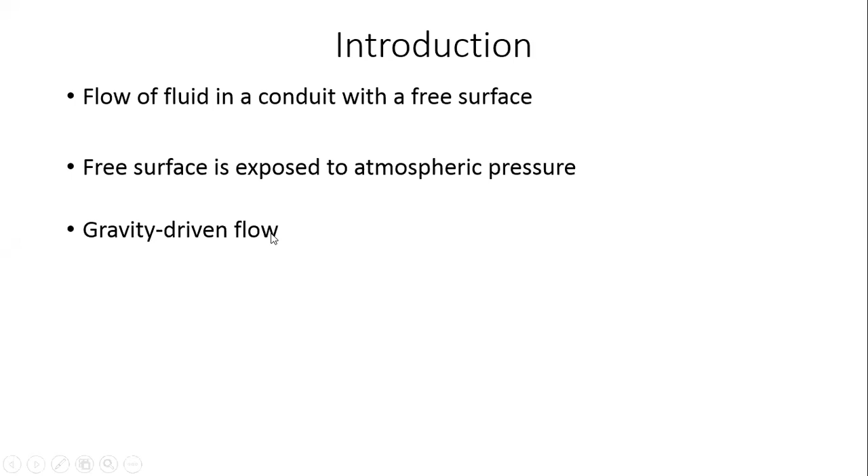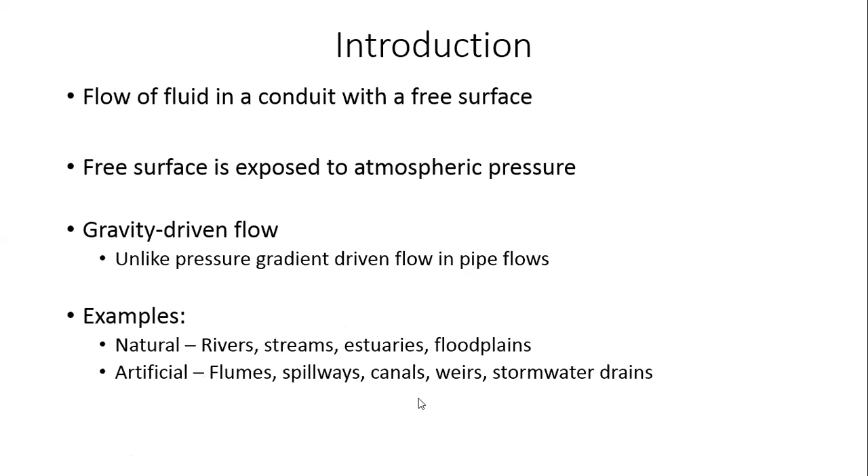We've got a lot of material to cover, so let's try to quickly get into open channel flow. The introduction portion we've already kind of done in the previous class, and I've also shown this lecture, so I don't want to spend too much time on this. All of this is known to you: flow of fluid in a conduit with a free surface is the fundamental definition of open channel flow, and this free surface is exposed to atmospheric pressure. The flow in open channels is predominantly gravity driven, unlike pipe flows which are pressure gradient driven. I gave some man-made and natural examples: rivers, streams, and estuaries are naturally occurring open channels, whereas flumes, spillways, canals, weirs, and stormwater drains are man-made or artificial examples of open channels.

So then we spoke about, if I give you a longitudinal view of the flow in an open channel, this is what it looks like.

I have the bed slope. The bed slope typically slopes in the direction of flow. So if the flow is from left to right, the slope will be going downwards from left to right, because that's what it means when I say it's gravity driven flow.

Gravity takes the flow in the direction of decreasing altitude. We use the symbol Y to denote the flow depth in an open channel. That's the standard symbol we use.

In terms of cross sections, there are many different types possible. Especially for man-made channels, you can have trapezoidal, rectangular, triangular, semicircular, and so on. Regular geometric shapes are possible for man-made channels, whereas natural channels have irregular shapes, which you can sometimes approximate as a trapezoid or rectangle, but in general they are irregular.

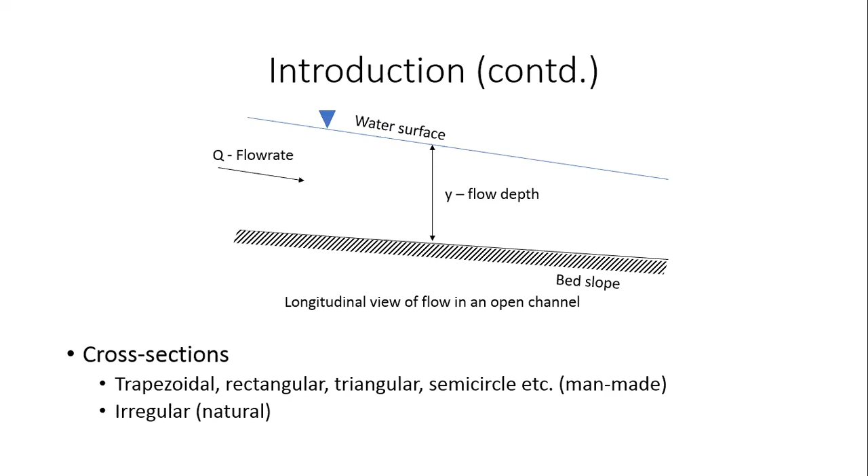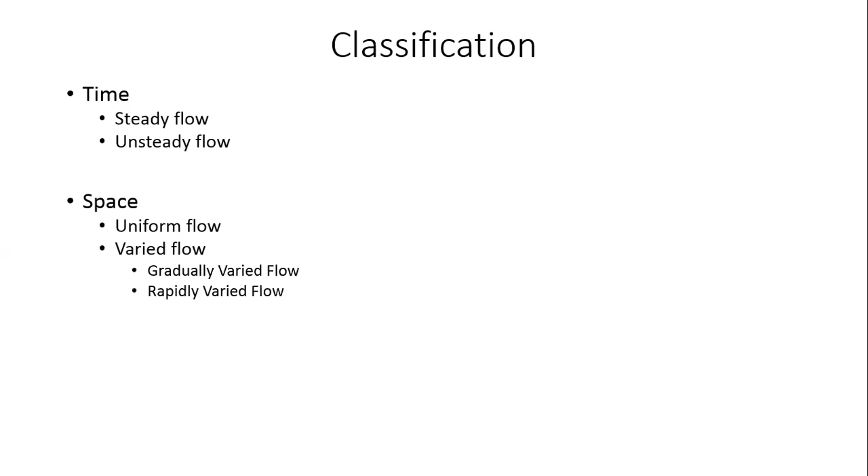So that's the very basic introduction to open channel flow. We also spoke about the classification, which I've already discussed at length, so I won't spend too much time. You have steady and unsteady on the basis of time, uniform and varied on the basis of space, and within varied you have gradually varied flow and rapidly varied flow. All of this is already known to you, so I'm not going to spend more time on this.

Reynolds number, of course, is rho v d by mu. Just like we had a classification in pipe flows into laminar, turbulent, and transitional, similarly we have a classification for open channel flow as well. The numbers are different because the characteristic length is different in pipe flow compared to open channel flow, so you get different numbers for the different classifications.

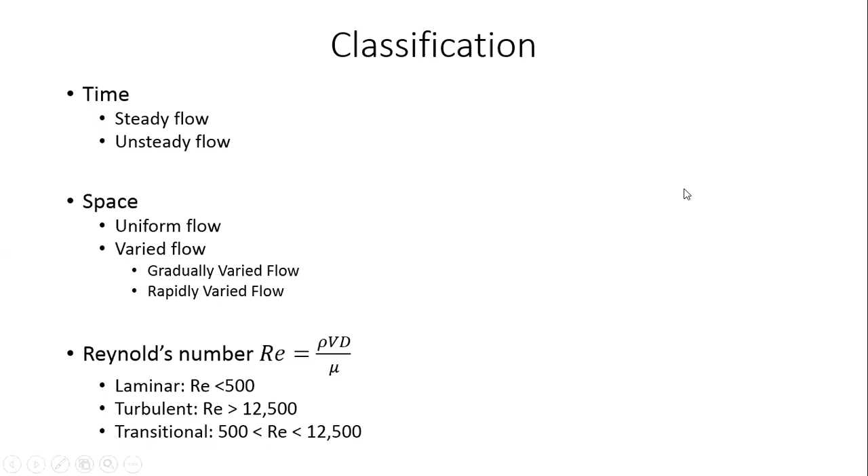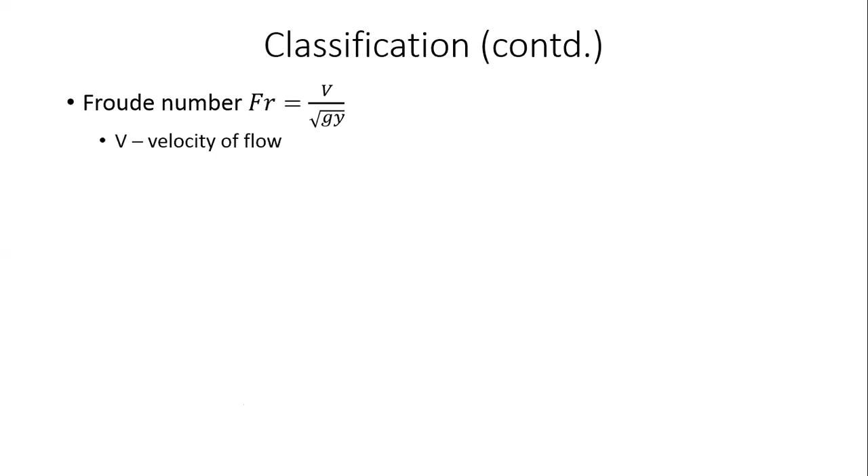The final one, which you haven't encountered so far, is the Froude number. This is essentially given as V over the square root of gy, where V is the velocity of flow, which could be the average velocity at any given cross section. g is acceleration due to gravity, and y is our flow depth. You can also think of it as the ratio of inertial forces to gravitational forces.

In open channel flow we had rho v d by mu, same as in pipe flow, described as the ratio of inertial forces to viscous forces. To find out which one dominates, we use the Reynolds number. In the case of Froude number, we use it to distinguish whether inertial forces dominate with respect to gravitational forces, or the other way around. That's what Froude number is.

What Froude number does is classify flow into 3 different regimes. If the Froude number is less than 1, we call it subcritical flow. If it's exactly equal to 1, the flow is called critical. And if it's greater than 1, we call it supercritical flow. We'll be talking about this again towards the end of the lecture, so we'll come back to this Froude number classification.

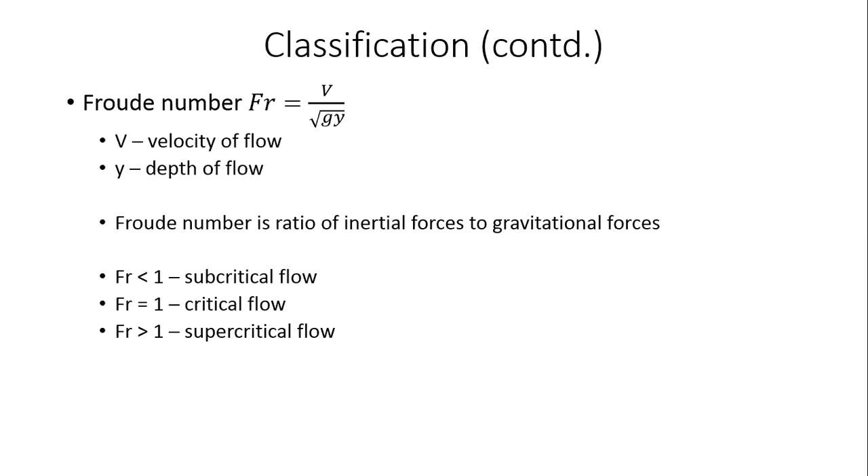So we already spoke about writing the energy equation for an open channel flow. Any questions so far on what I've spoken about?

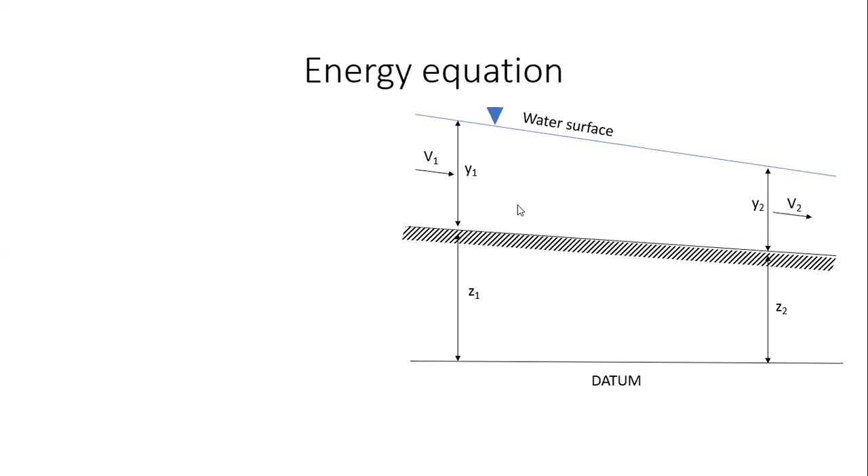So what we're going to do now is write the energy equation for an open channel flow, in which I've selected 2 random points, 1 and 2, where the corresponding datum elevations are Z1 and Z2. The flow depths are Y1 and Y2, and the velocities at those cross sections are V1 and V2. With all this information, I can write the Bernoulli equation between points 1 and 2 as Y1 plus V1 squared by 2G plus Z1 equals Y2 plus V2 squared by 2G plus Z2 plus HF. Naturally, between these 2 points, if flow is taking place, energy has got to be lost. The total energy at point 1 cannot be exactly equal to the total energy at point 2, because some energy will be used up in overcoming friction. That's what this HF term represents, which you're all very familiar with in the context of pipe flow. We're just putting it in the same context for open channel flow.

Okay, so now how did I get Y1 and Y2 in the first term of the Bernoulli equation? Can anybody answer that?

Why did I get Y1 and Y2 as the first term on both the left hand side and right hand side? Anybody wants to answer that? Okay, if nobody opens their mouth, then I'll call out somebody. Purna Chandra, one second. No, sir, no idea.

Pavan. Sir, I'm thinking. How have we got Y1 and Y2 in this equation? Usually when we write Bernoulli, we write P1 by gamma, P2 by gamma as the first term, right? How did we get Y1 and Y2?

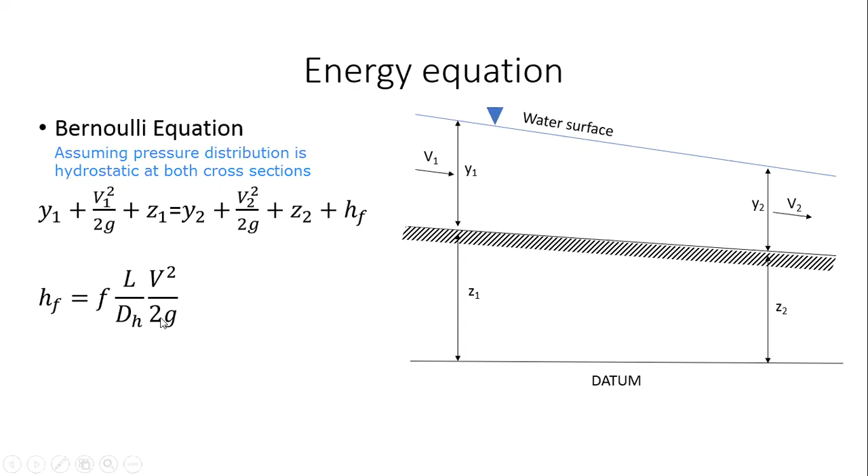But for a non-circular pipe, we came up with the concept of dh, the hydraulic diameter, defined as dh equal to 4A by P. In pipe flow, we also use another concept called hydraulic radius, defined simply as A by P, which is actually dh by 4. So hydraulic radius is A by P, which is one-fourth of dh.

Now the critical thing to remember in open channel flow is that only the portion of the fluid that is in contact with the bed surface counts in your perimeter. Let me just draw this quickly.

So imagine I have flow happening in a rectangular cross section, and this is the water surface. What is the area for this hydraulic radius equal to A by P? The area will be this region — let's say this is the depth. Let me draw it again: I have a rectangular cross section, the flow depth is from here to here, this is my flow depth y, and the bottom width is here. What is the area of the cross section in this case?

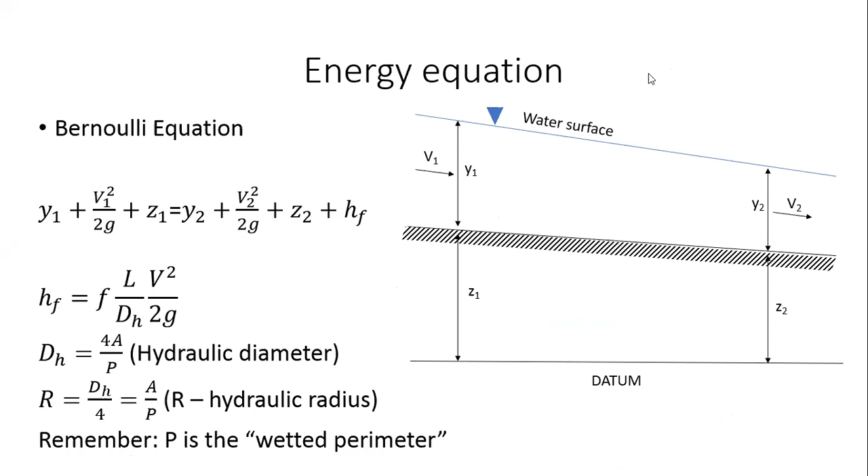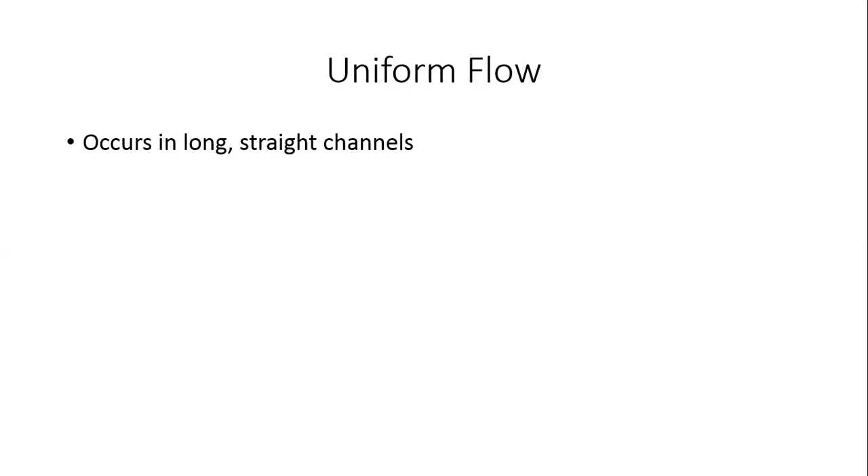Okay, so that is the concept of the Bernoulli equation in the case of open channel flow. All right, so now what we're going to do is we're going to talk about this idea of uniform flow. Uniform flow is a condition where I have constant flow depth across the entire length of the channel. So naturally, this cannot happen in a situation where the cross-sectional area is changing, or the slope of the channel is changing, or if the channel is winding and meandering like a river. If I have a long straight channel in which the slope is constant and the channel cross-section is also constant, then it is possible for me to have uniform flow.

And remember what the definition of uniform flow is - uniform flow means that nothing is changing as a function of space. So if I go along the length of the channel, at every point in the channel, the flow depth is the same. It is not at all changing. And since we are only going to be talking about constant flow rate, if the flow rate is constant and the cross-sectional area is not changing and it is a straight channel, why will the flow depth change? The flow depth at every cross-section will remain the same.

So that is this idea of uniform flow. Now, the interesting thing about this is that this approximation may not always be 100% accurate to use in every scenario. But the valuable thing about the uniform flow approximation is that it allows us to estimate flow rates in a wide variety of scenarios. You can assume that over a length of, let us say, 1 kilometer or 5 kilometers, the flow depth is not changing. And just by measuring the flow depth, you can convert it to an estimate of the flow rate.

So let us say you are an engineer who is employed by the state government, and then they come and ask you - let us say you are stationed at Kalahasti. Then near Kalahasti, there's a big open channel that takes water from the Krishna River all the way to Chennai city. I spoke about it last time, right? So they come and ask you, hey, what is the flow rate in the channel at Srikalahasti? Can you just go and check?

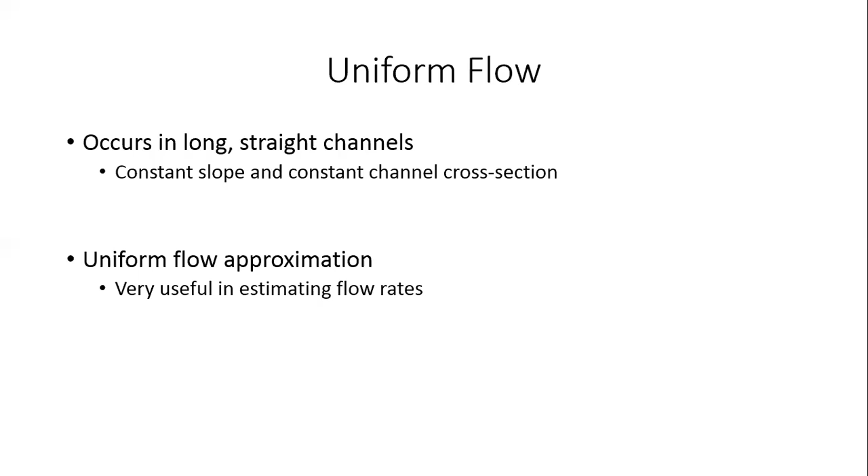So people can use this approximation to very easily estimate the flow rate, and then they can make decisions. Okay, so if this flow rate continues for the next 10 days, then so much water can be moved to Chennai city, or it can be moved to Chittoor district, whatever it is, right? So this uniform flow approximation is a very, very useful tool which allows you to estimate flow rates very easily. Just measure the depth and convert it to a flow rate, if you know the cross-section details and so on.

So you can have a river or a stormwater drain or an open channel connecting two different places where the water is flowing. You can very easily apply this uniform flow approximation to estimate the flow rate in an open channel. This has tremendous practical significance. So you will notice that throughout the rest of the semester, although we'll talk about gradually varied flow, rapidly varied flow, and all of these things, we'll keep coming back to the uniform flow approximation, because it is so powerful and so helpful in practical scenarios.

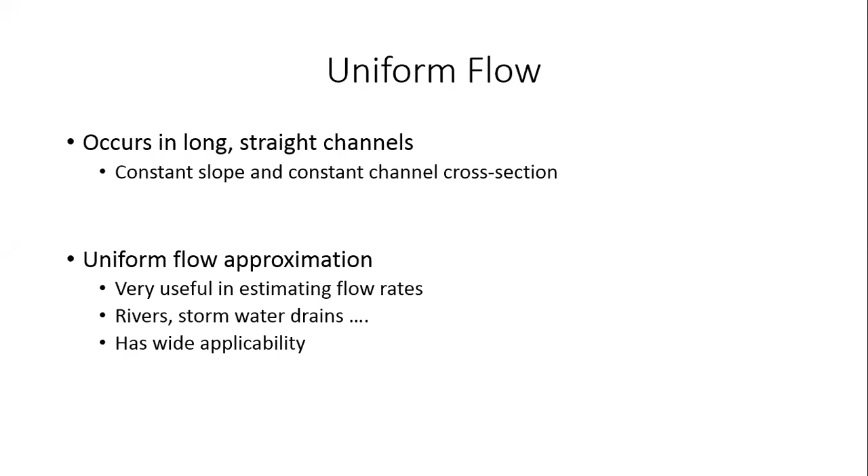Okay, so now this uniform flow approximation, we are going to use it to estimate the velocity at a cross section or the flow rate at a cross section. So this is what it's going to look like.

So now I'm saying that the flow is uniform. When I say the flow is uniform, it naturally implies that y1 and y2 are the same, it has to be the same. The incoming flow rate is steady, the cross section of the channel is not changing. So at cross section 1, if it is a rectangular channel, it is the same rectangular channel at cross section 2 also. So if flow rate is steady and the cross section is identical at both sections, then y1 and y2 will be exactly equal.

That's the very definition of uniform flow. And similarly, v1 and v2 will also be equal. So if I assume that the flow rate is steady and the cross section is uniform, then since y1 and y2 are the same, v1 and v2 will also be the same. So what does this mean?

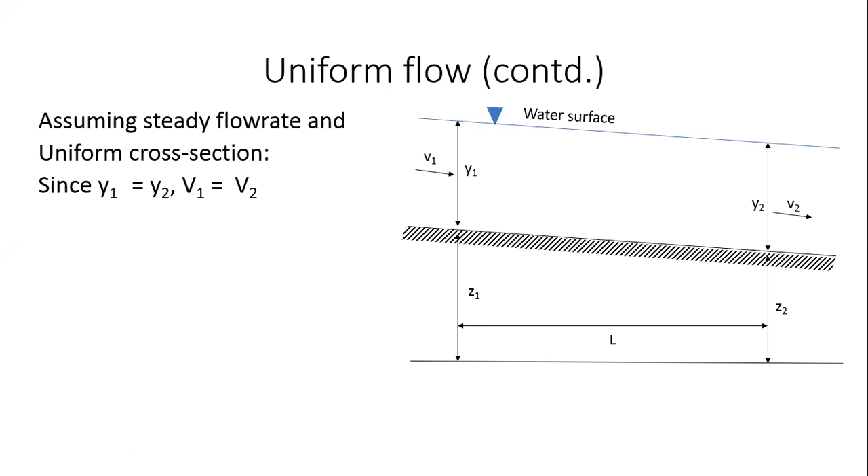This simplifies our Bernoulli equation tremendously. So our Bernoulli equation will simply become Z1 equal to Z2 plus HF. Everybody agrees with this? Y1 and Y2 are the same on both sides, V1 square by 2G and V2 square by 2G are the same on both sides. They all get cancelled out and you are left with Z1 equal to Z2 plus HF.

So now I can simply rewrite this as, if I assume the bed slope is S0, then I can write it as HF equal to Z1 minus Z2, which is equal to S0 into L. If the slope is S0, S0 into L will tell you the difference in the bed elevations between points 1 and 2. Is that okay? This is fairly easy, right? Simple geometry.

Okay, now we've already derived an expression for HF. Remember, a couple of slides back, we wrote FL by DH, V square by 2G. Now I've replaced that DH with my hydraulic radius. You remember hydraulic radius? Hydraulic radius is DH by 4. So DH, I've replaced it by 4R. Now I have two equations for HF. One is that HF is equal to S0 times L. And the other is that, okay, where is my mouse pointer?

Okay, there it is. HF equal to S0 times L, and HF equal to F times L by 4R into V square by 2G.

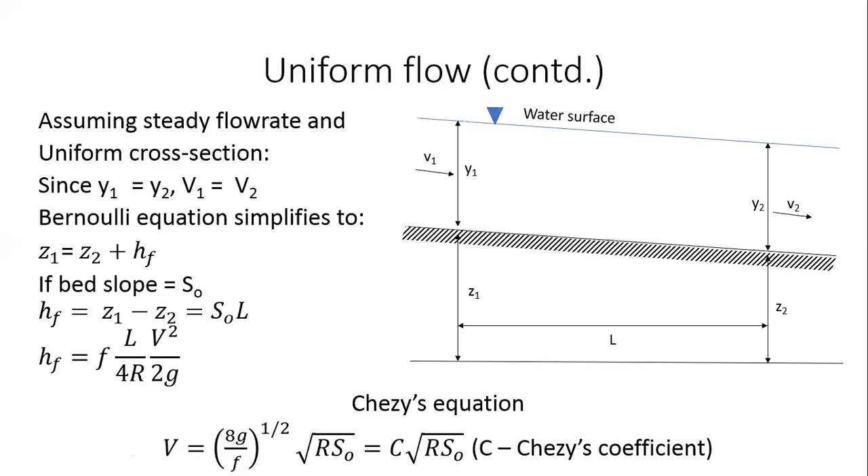V equal to 1 by N, R power 2 by 3. How did it become R power 2 by 3? The previous equation looked like square root of R. Now I'm replacing this C with R power 1 by 6. So R power 1 by 6 into R power 1 by 2 becomes R power 2 by 3, right?

So this is the very, very famous and popular Manning's equation. The velocity at a cross section is simply 1 by N, where N is this Manning's roughness coefficient, multiplied by R power 2 by 3 and S0 power half, right?

So now imagine this: imagine you are at that Kalahasti location. You've gone there to measure the flow rate, right? But you can't directly measure the flow rate - you just measure the flow depth. You know the slope of the channel at that location, because the channel is constructed by us, so we know what this bed slope is, so we know this S0 term.

We know that this channel is made of concrete. If we get a chance, maybe next semester we'll stop by that open channel. It's maybe about 20 kilometers from our campus - that's where we are going to get the water for our campus in the next few years. So the channel has a lining made of concrete, right?

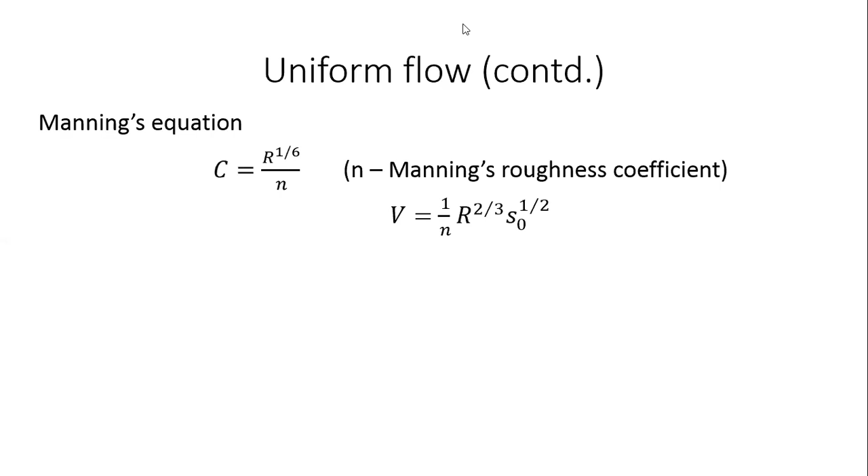You see how useful it is? I know that it is a trapezoidal cross section, and I know the shape details of that. I know what the bottom width of the trapezoid is. I know what the side slope of that trapezoid is. I know the flow depth - I go out and measure the flow depth, very easy to measure, right? You just put a scale in, a graduated scale, it tells you what the flow depth is. I know the bed slope S0. Then just using that one measurement of depth, I can quickly calculate what the velocity is. Multiply this by the area of the cross section, I get the flow rate, right?

So I can use either Chezy's equation, which will be Q equal to A into C under root R S0, or I can use Manning's equation, Q equal to 1 by N, A into R power 2 by 3, S0 power half. Is this okay?

The ranges for the different values of C and N are given. Chezy's coefficient typically ranges between 30 and 90. The units are mixed, so we ignore that. Typically we just say Chezy's coefficient is 40 or 60 or whatever it is. We don't bother with the coefficient's units, but remember that it has dimensions. We typically ignore this because it's mixed units and doesn't make any sense.

The roughness coefficient ranges from about 0.01 to 0.15. This again has mixed units. We typically just say Manning's coefficient is 0.01 or 0.02, and we don't bother with the units.

These are empirical equations, right? So what is the use of this expression? If I give you the flow depth, the cross-section details, and the bed slope, I can easily obtain the velocity and flow rate at that cross-section. Or in other words, if I give you the flow rate and the cross-section details, you can easily find out what the flow depth should be. Why would you need this? The first part is obvious - if I give you the flow depth and cross-section details, you can find the velocity and flow rate. But why do you need the second part?

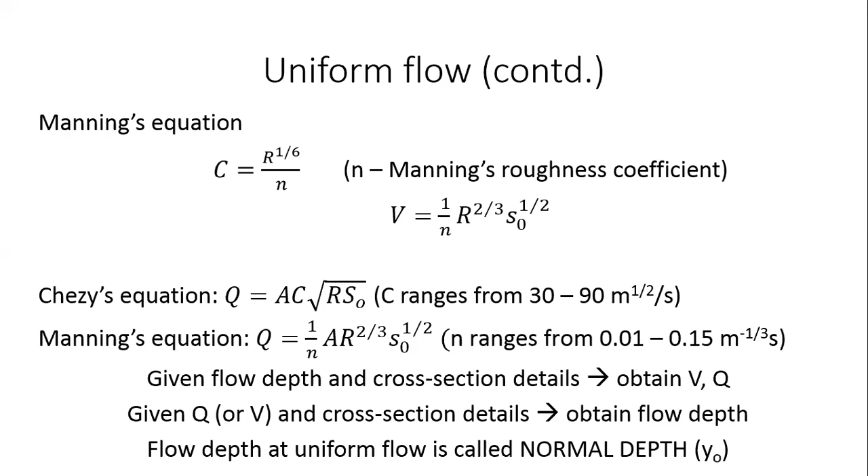All right, so I think I've solved a couple of example problems here. Very, very straightforward problems. I will not spend too much time on this. Let's quickly go through this.

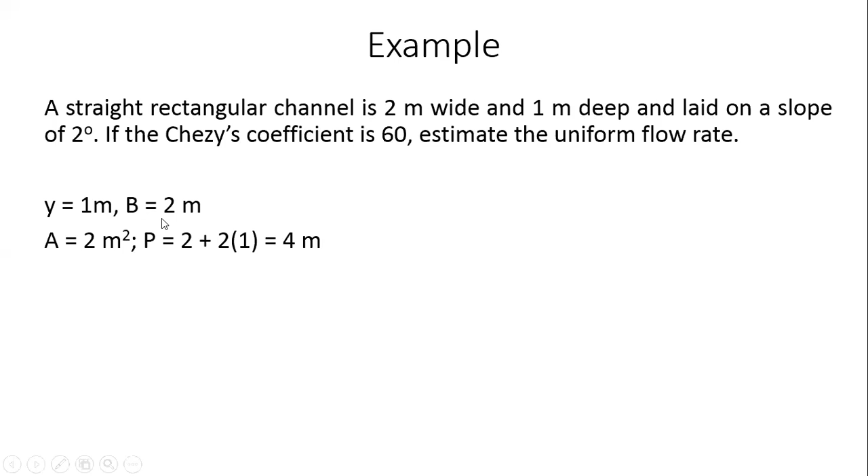A straight rectangular channel, 2 meters wide, 1 meter deep, laid on a slope of 2 degrees. If Chezy's coefficient is 60, estimate the uniform flow rate. Such a simple problem. The flow depth is given as 1 meter. The rectangular channel's width is given as 2 meters, the bottom width. So these two pieces of information are enough to calculate area and wetted perimeter. Area is 2 into 1, 2 meters square. Wetted perimeter is 2 plus 2 times 1 - remember B plus 2Y - so that's 4 meters. So once you have A and P, you can find R.

R is equal to A by P, 0.5. Then S0 is given as tan 2 degrees. So you simply put everything into the equation. Q equal to A into C into under root R S0. A is known, you just found it. C, Chezy's coefficient, is given as 60. R you've just found out, and S0 is also given. So you put all those terms into the equation, you find the flow rate, 16 cubic meters per second.

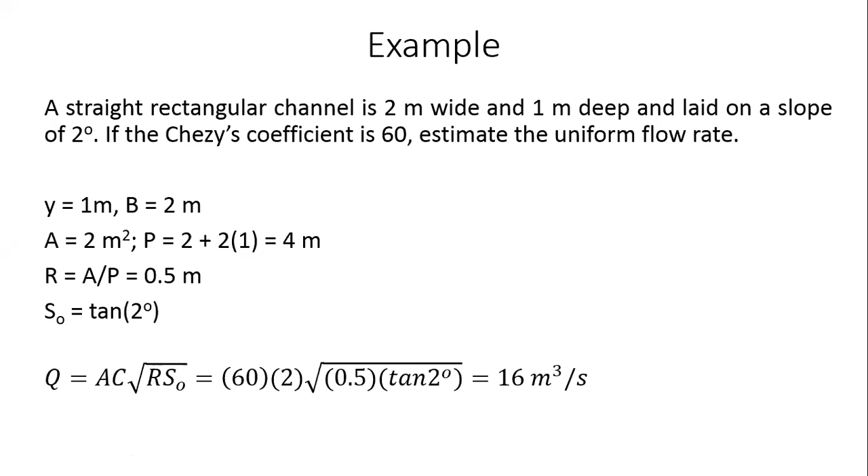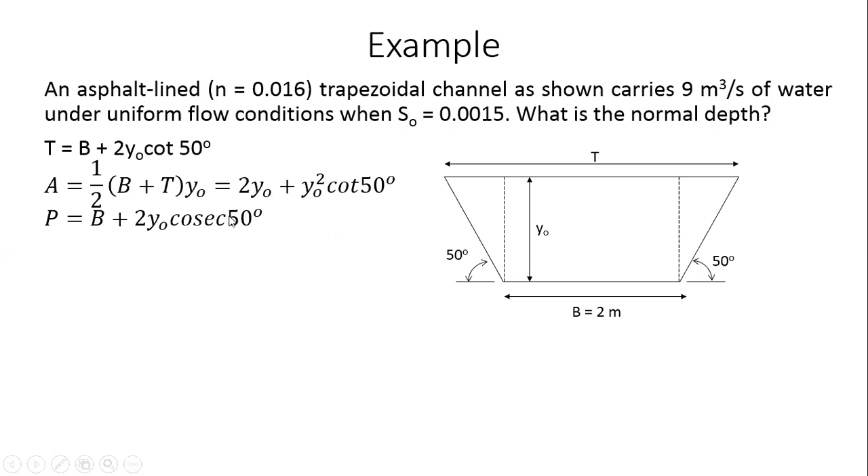Then we put all of this information into Manning's equation. What is Manning's equation? Q equal to 1 by n, A into R power 2 by 3, S naught power half. So you put all of those in. I've converted A and R, brought them together and written it as A power 5 by 3 and P power 2 by 3. This is already explained, so I don't want to spend time on this.

So I've just expanded it out. Now I've got a fairly complex equation. It's difficult to solve this without using a trial and error approach. So what you can do is simply make guesses for Y naught and then try to equate LHS and RHS. Guess Y naught, solve both LHS and RHS, and see if they're equal. If they're not equal, guess again and keep doing that iteratively until you guess the value of Y naught correctly. If you solve it iteratively, you get the answer Y naught equal to 1.387 meters, whatever it may be. Any questions on these two examples?

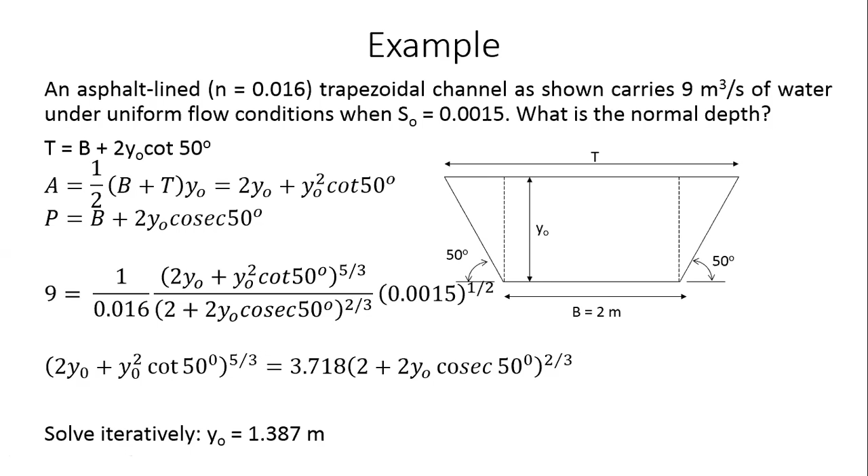Okay, let's keep going. Now this concept of most efficient cross section is also very interesting. As you have seen from Manning's equation, for a given channel material, whether it's concrete, wood, or brick lining, and a given bed slope, Q is proportional to R power 2 by 3.

Because 1 by n is fixed once you fix the channel material - whether concrete, earthwork, or brick lining, Manning's roughness coefficient gets fixed. Once you fix the bed slope, S naught is also fixed. So Q only depends on R power 2 by 3, meaning Q is proportional to R power 2 by 3.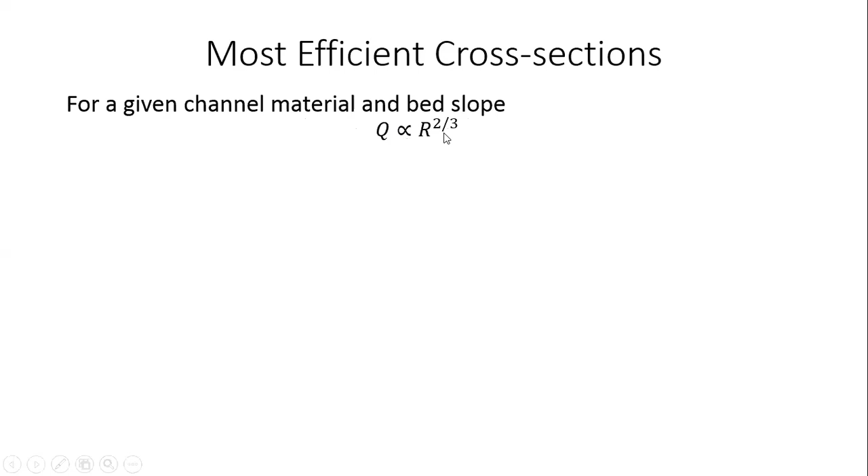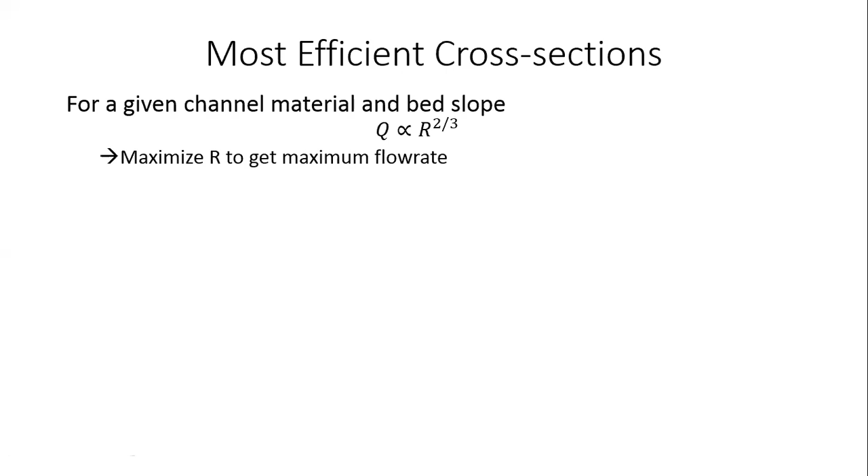So given a certain channel, if I want to maximize the flow rate, I have to maximize R. If R increases, Q also increases; if R decreases, Q also decreases. For a given cross-sectional area, if I want to maximize R, P has to be minimum - the wetted perimeter has got to be minimum, because R is A by P. So I want to find the flow depth such that my wetted perimeter is minimum.

Why is it important to minimize wetted perimeter? If wetted perimeter is minimum, that means friction losses will be minimum. So the channel can carry more fluid, more efficiently.

Yes, somebody has a question. Somebody unmuted their microphone - no, by mistake.

Okay, so for a given cross-sectional area, once you fix your A, R is maximum when P is minimum. So when the wetted perimeter is minimum, that means less friction losses, so the flow can be more efficient. Less friction is obviously more efficient.

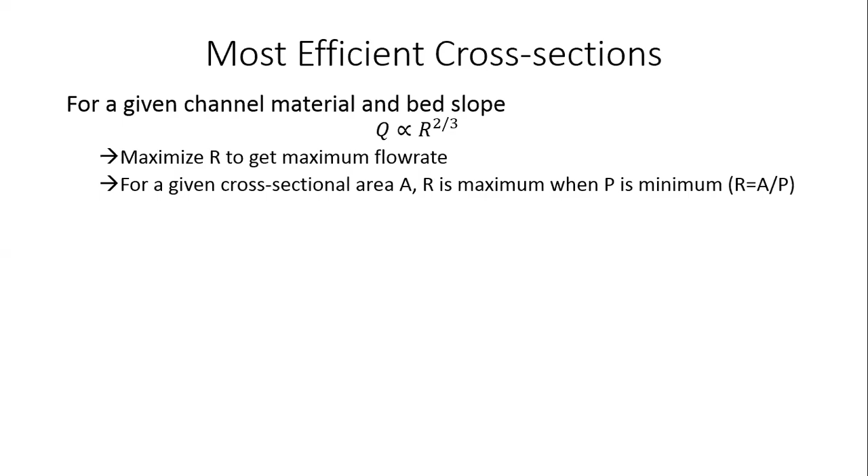I'm going to take a trapezoidal cross-section as an example - you can do this for any cross-section. Trapezoidal cross-section with bottom width B, flow depth Y naught, and a side slope of M is to 1, M horizontal, 1 vertical. Then I can write my wetted perimeter as B plus 2 Y naught square root of 1 plus M square. This is straightforward geometry, so I'll not explain this.

My objective is to minimize my wetted perimeter. So what do I do? I set my dP by dy to 0. I want you to solve this and see what you get. When I do that and solve this, I will get R equal to Y naught by 2. So when my hydraulic radius is half of the flow depth, that is the condition for which I get maximum flow rate in a trapezoidal channel.

I have not placed any constraint on my M value - M could be anything. No matter what the M value is, for a trapezoidal cross section, flow rate is maximum when the hydraulic radius is Y naught by 2. In fact, for a rectangular cross section, a rectangle is basically a limiting case of a trapezoid - when M equal to 0, this trapezoid becomes a rectangle. So you will find that for a rectangle, the maximum flow rate happens when the flow depth Y naught is equal to half the bottom width, B by 2.

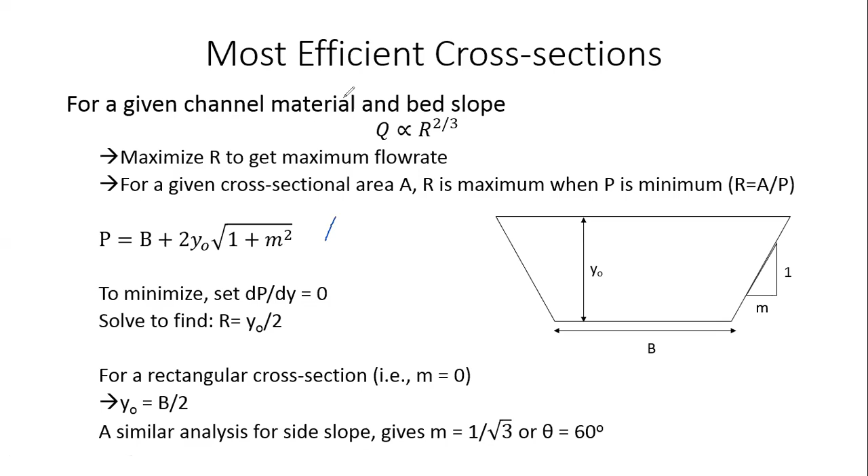Wait, area a equal to. But m is also not a constant, na? No, I'm keeping m fixed. I'm not constraining this m. For a given m and a given area, I'm trying to find out what relationship. Let me just write it. So what will be the area? B plus my into y. This is area, correct?

For a trapezoidal cross section, the area is b plus my into y. How did I get that? It is basically the area of the trapezium is the area of this rectangle plus the area of these two triangles. So area of the rectangle is b into y. Area of this triangle is half my into y, half my square plus half my square equals my square. This is okay.

If you sit with a piece of pen and paper, you can get it. So then I can rewrite this: b is equal to a by y minus my. Is that correct? B equal to A by Y minus My, right?

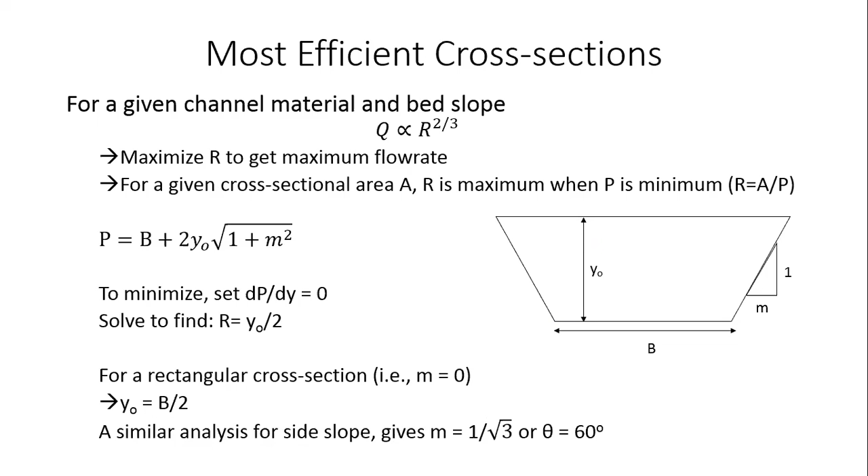Okay, so now we are going to move to the next topic, which is called specific energy. We already know what total energy is - we defined it as Y plus V square by 2G plus Z at any cross section. We are going to define another term called specific energy: this E, specific energy, is simply Y plus V square by 2G.

I'm going to rewrite this in terms of Q square: it will be Y plus Q square by 2G A square. If you see, this E looks like it's dependent on Y and something else, but this something else is also dependent on Y - in fact it's dependent on Y square, and it's in the denominator. A is a function of Y, so A square will be Y square. So I have Y plus some function with Y square in the denominator - this will be some kind of a cubic function.

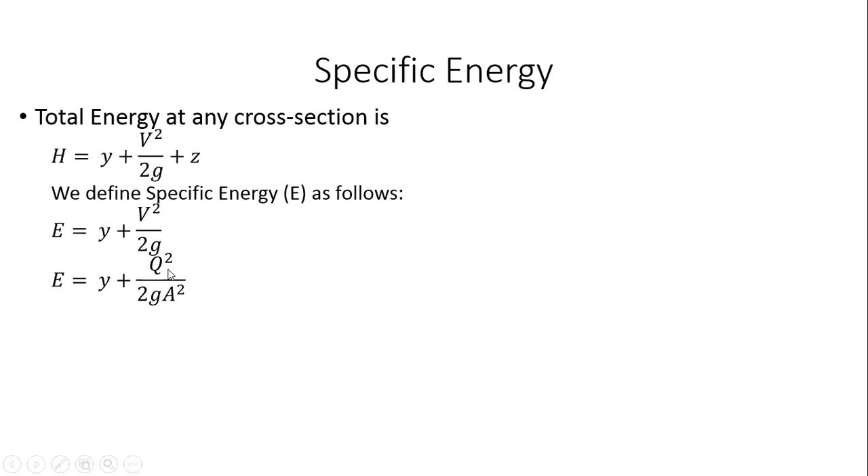So what I did was try to plot this specific energy as a function of Y for a given discharge, for a given cross section, and I got something that looks like this. I plotted E on the x-axis and the flow depth Y on the y-axis. I tried varying different values of Y and computed the value of E for different values of Y given the flow rate and cross-section details. Whether it's a trapezoidal or rectangular cross-section, no matter what cross-section you pick, you'll get a curve that looks like this.

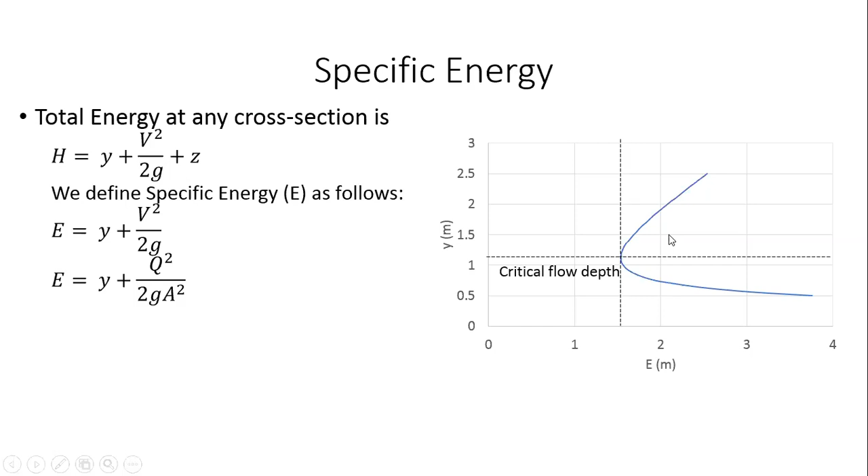So this specific energy takes a minimum value for a certain flow depth, and for every other specific energy higher than that minimum, there are two possible depths for the same specific energy. This specific energy curve has a minima at this point, and at this minima point it has a certain flow depth, which we'll call the critical flow depth. For any other specific energy, there will be two possible depths for the same energy. If I draw a dotted line at any location other than the minima, it will intersect the curve at 2 points, meaning for the same specific energy I can have two different depths - one I'll call the subcritical depth, and the other the supercritical depth.

So now, for a given flow rate, minimum specific energy corresponds to critical flow depth, where Froude number equals 1. I have not yet proved this to you - just hang on for some time. Minimum specific energy corresponds to critical flow depth, and for all other values of specific energy, there are two possible flow depths: one is called subcritical flow depth where Froude number is less than 1, and the other is supercritical flow depth where Froude number is greater than 1. Is this okay?

All right. Sir, yes. Did you say yes, sir?

I'm assuming this is okay so far. Now I'm going to find out at what condition this minima happens. I want to find the condition for this minima. So how do I find it? I take a given value of Q, set the specific energy dE as a function of dy, and say dE by dy equal to 0. E is a function of y. For a given value of Q, I'm going to find out what the condition for this minima is.

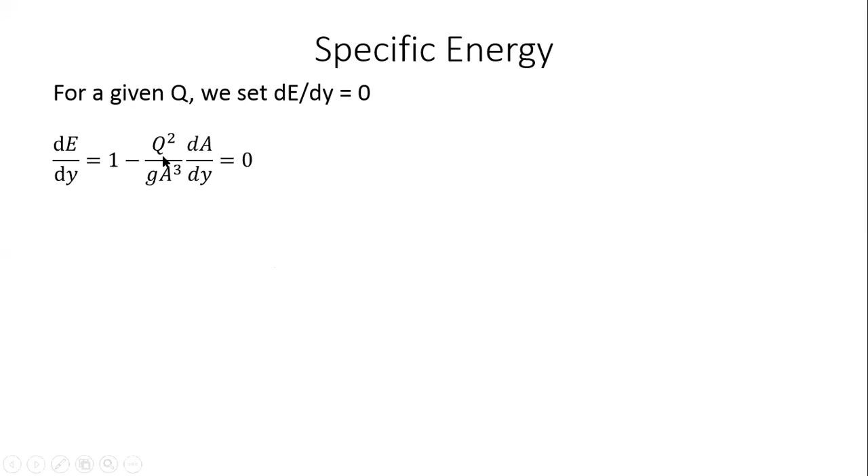So E equals y plus Q squared by 2g A squared. I'm going to differentiate this with respect to y. I'll get dE by dy equal to 1 minus Q squared by gA cube, dA by dy, equal to 0. Now I want to find out what this dA by dy is.

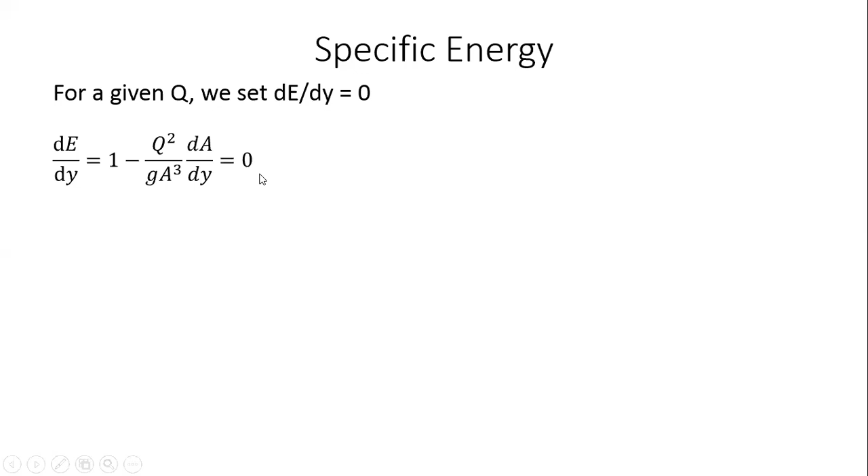So what I'll do is take some random cross section where the flow is at some depth, and the top width is given by this capital T. I'll take an elemental strip of thickness dy at the surface of the channel. The area of this elemental strip is dA, which will be T times dy. Agreed? Yes, sir. So dA by dy is simply capital T.

So I've found out what dA by dy is. I'll replace dA by dy with capital T and get Q squared T by gA cube equal to 1. This is the condition for minimum specific energy. So if Q squared T by gA cube equals 1, that means I have minimum specific energy. This is what it means: for a given flow rate, critical flow corresponds to minimum specific energy.

I have not yet proved that this is equal to critical flow. I'm keeping it as suspense for the very end. I'm saying for a given flow rate, this condition Q squared T by gA cube, which corresponds to minimum specific energy, is the same as critical flow. But we'll show that it is indeed critical flow a little bit later.

Just hang on. Now I want to also ask, what is critical flow? If you remember from the earlier slides, critical flow is when the Froude number equals 1. So I have not yet shown that this is the same as Froude number equal to 1. I'm going to show it. Just wait for a couple of slides.

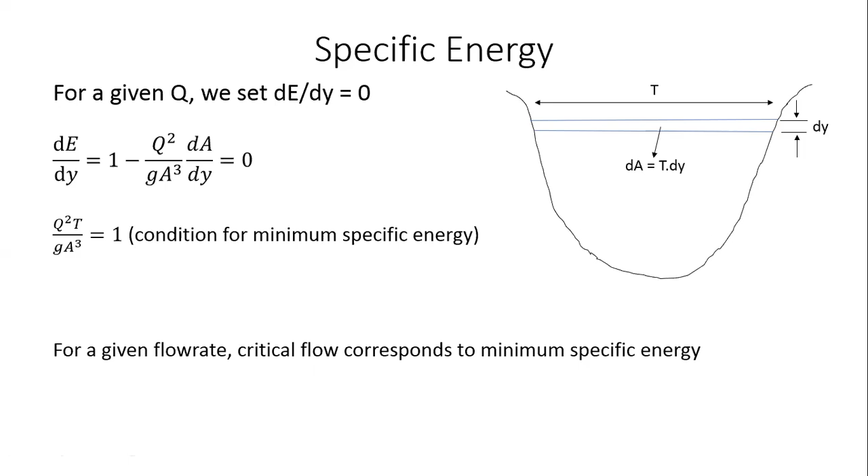So now this is for a given Q. I find out what the condition for the minima on that curve is, and I find that condition is Q squared T by gA cube equal to 1. Now I'm going to take it the other way around and say, what if my Q is variable? For the same specific energy, I can have two different flow rates, right? Let me try that. Let me see what happens if I keep E constant and vary Q.

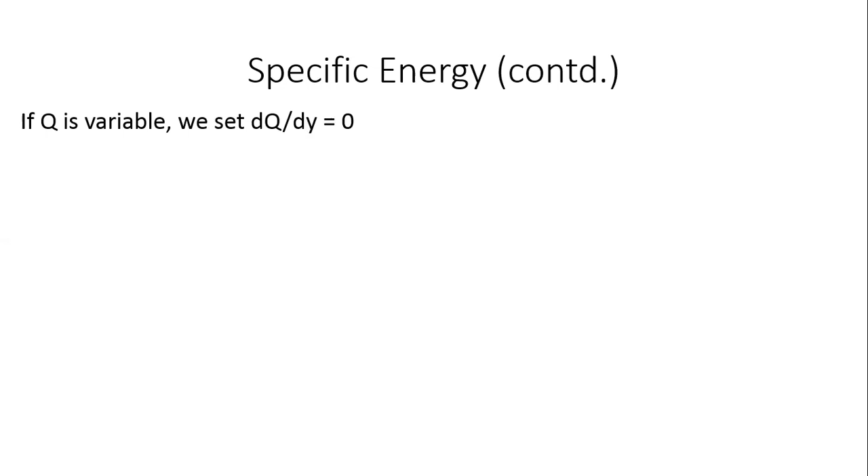I set dQ by dy to 0 and find out what happens. Remember, E equals y plus Q squared by 2g A squared. I rewrite this as Q equal to A times the square root of 2g(E minus y). So for a given specific energy, I want to find the condition for dQ by dy. Does it have a minima or maxima, or what? So I'm going to set dQ by dy to 0.

dQ by dy, applying the chain rule, will be the square root of 2g(E minus y) times dA by dy, minus the derivative of the square root of 2g(E minus y), multiplied by A. So I've got this complicated expression: square root of 2g(E minus y) times dA by dy, minus gA divided by square root of 2g(E minus y). What is square root of 2g(E minus y)? It is Q by A.

I'll replace square root of 2g(E minus y) with Q by A in both terms. So I'll get T, since dA by dy is T, multiplied by Q by A, minus gA squared by Q. How did I get this?

Under root 2g(e-y) is simply q by a. So in the denominator I have q by a, so that a goes to the numerator, and it becomes g a square equal to 0. Then I rearrange the terms, and I'm surprised to see that I get the same expression, q square t by g a cube equal to 1.

This is exactly the same as what I got for the minimum specific energy. And if you do one more step, you will find out that this q is the maxima. You'll have to take the second differential, d square q by dy square, and find out if it is positive or negative. I'll leave that to you, and you will find out that this condition is a maxima.

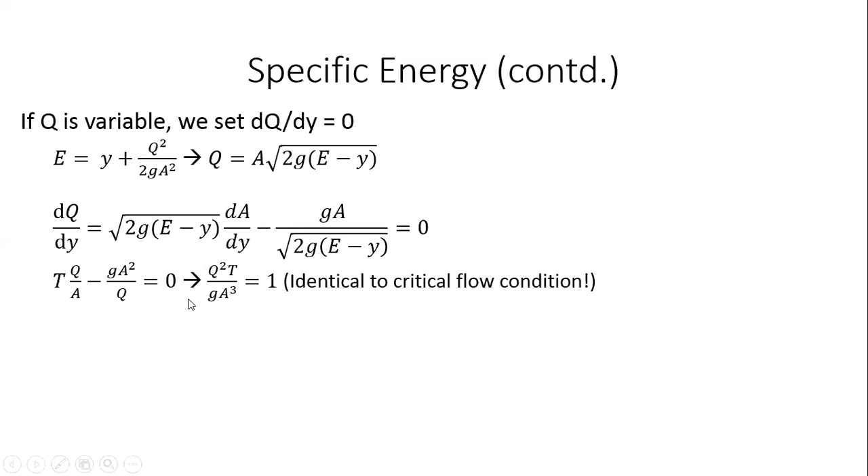So if I vary my q for a given specific energy, critical flow corresponds to maximum flow rate. So for the same specific energy, critical flow condition corresponds to maximum discharge. Any questions up to this point?

So this is the point where what we have shown is the minima for specific energy. The condition for minima is q square t by g a cube equal to 1. That is, if I keep q constant and vary e and find the minima, I find out that the minima happens when q square t by g a cube is equal to 1.

Then I say I'll keep the specific energy constant and vary my q and see what the condition for minima or maxima for q is. So I did that, set dq by dy to 0, rearranged terms, and got the same expression, q square t by g a cubed equal to 1. I also found out that it is a maxima condition. You will do the second derivative and find out.

So this is very interesting: if I give you a certain specific energy, q square t by g a cube equal to 1 corresponds to maximum flow rate, maximum discharge, and also corresponds to minimum specific energy. But I have still not proved to you that it is the same as critical flow. So that is what we are going to do next.

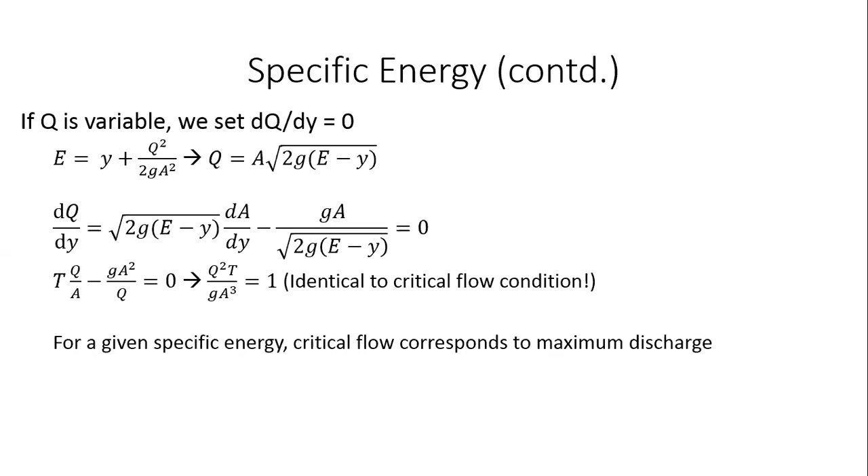We spoke about Froude number earlier in the lecture, Froude number equal to v by under root gy. And I said that if this number is equal to 1, that is equal to critical flow, critical condition. I kept saying critical flow corresponds to this, critical flow corresponds to this, but I have not yet shown that q square t by g a cube equal to 1 is the same as v by under root gy.

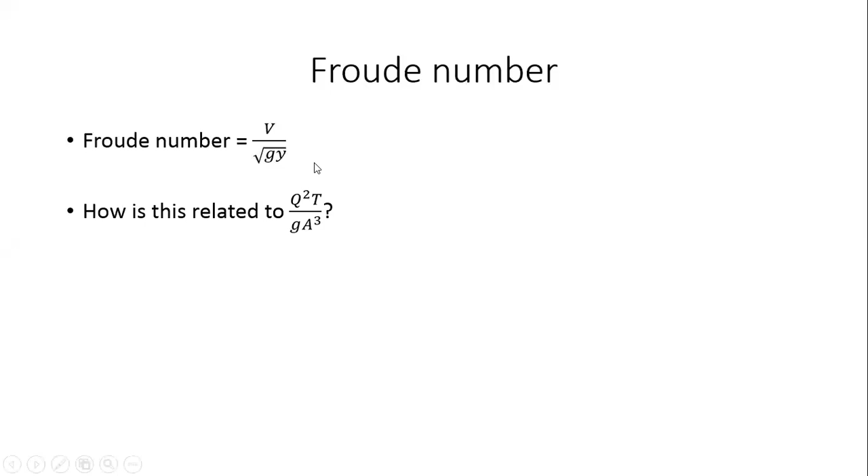So for that, I'm going to find out the relationship between v by under root gy and q square t by g a cube. It's actually one and the same thing. Q square t by g a cube, I can rewrite this as v square by g into a by t. Does everybody agree? Q square by a square is v square, so I have v square t by ga, and I simply rewrite it as v square by g into a by t.

So this is actually Froude number square. So if q square t by ga cube equal to 1, then Froude number is also equal to 1, because it's Froude number square. But how did this become Froude number? Didn't I say Froude number is v by under root gy? I did say that, but that is a special case for a rectangular cross section.

For a rectangular cross section, a by t will be y, correct? The top width is the same as the bottom width, so a by top width will be the flow depth y. So for a rectangular cross section, Froude number is v by under root gy. But in a general sense, if I were to write Froude number precisely, it is v by under root g into a by t. Now you can see that v by under root g into a by t is the same as q square t by ga cube. If you take the square of this, it's the same as q square t by ga cube.

So t varies with height now? T varies with height, yes, but a by t remains constant? No. If I change the flow depth, the top width will change. But for a rectangular cross section, no matter what my flow depth is, the top width will always remain the same. Only for a trapezoidal or other shape, other than rectangular, when I change the flow depth, the top width will also change.